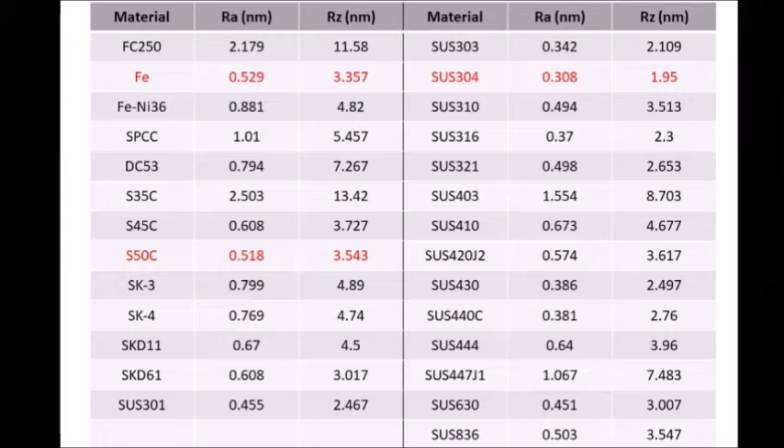The list on the right are stainless steel materials. We have polished 15 types of stainless steels. The best Ra is 0.3 nanometers, and Rz about 1.95 nanometers from the material stainless steel 304.

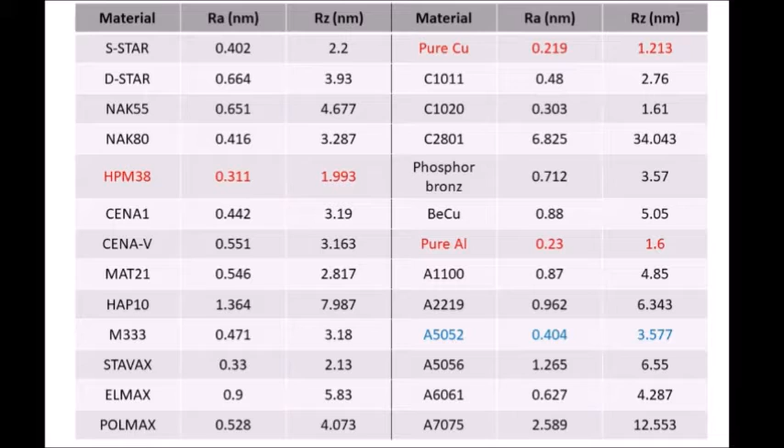The next section is aluminum. Pure aluminum also has the best roughness, and it is Ra 0.2 nanometers and Rz 1.6 nanometers. I have a sample of the item A5052. This surface is before lapping. It has lots of scratches. This surface is after lapping. Roughness is Ra 0.4 nanometers and Rz 3.5 nanometers. Isn't it shiny and beautiful?

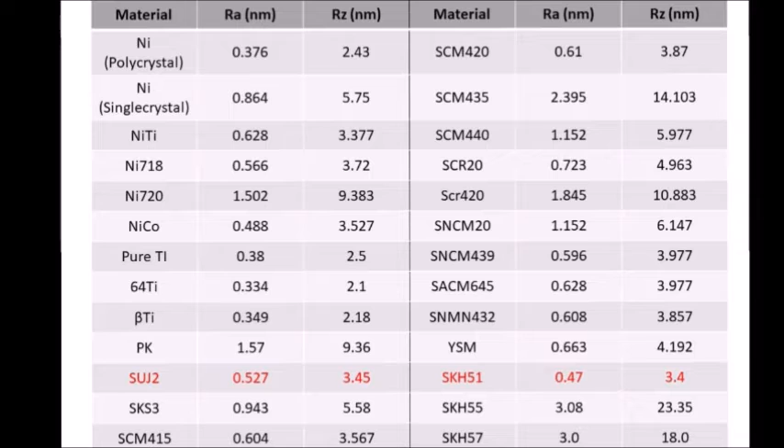Let's move on to the third page of metal. SUJ2 has the best roughness in this section. Ra is 0.5 nanometers and Rz 3.4 nanometers. Material SKH51 in the bottom has the roughness of Ra 0.4 nanometers and Rz 3.4 nanometers.

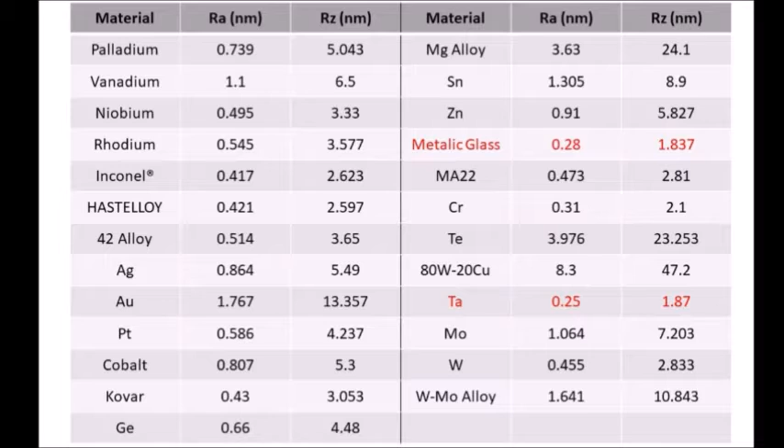Fifth page of metal. This is the last page from metal materials. The material spron, which is an alloy of cobalt and nickel, has a good roughness. Ra is 0.26 nanometers and Rz 1.1 nanometers.

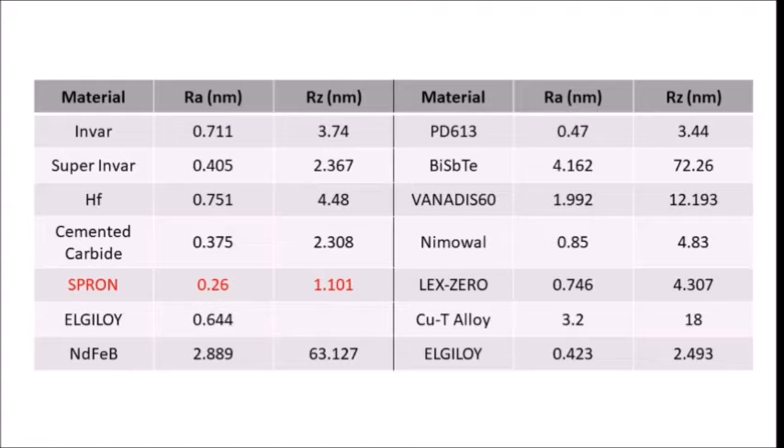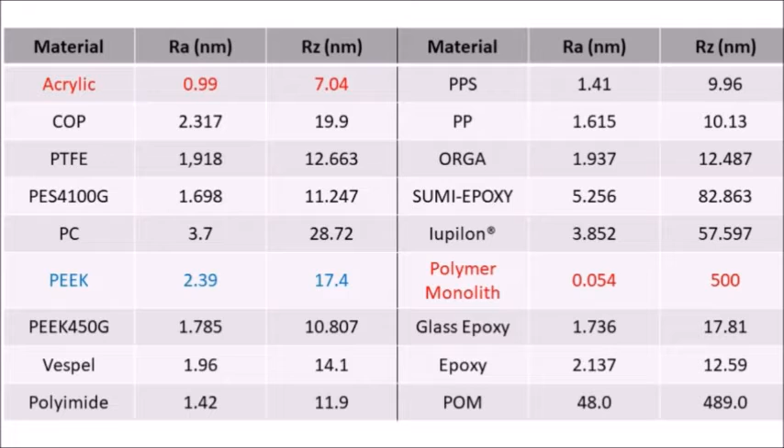The next material we will introduce is resin. The material acrylic has the best roughness. Ra 0.9 nanometers and Rz 7 nanometers. Also, a material called polymer monolith has a great roughness of Ra 0.05 nanometers. I have a sample of the material named PEEK. This surface is before lapping, and the back surface is polished down to Ra 2.39 nanometers, Rz 17.4 nanometers. You can see the difference quite clearly.

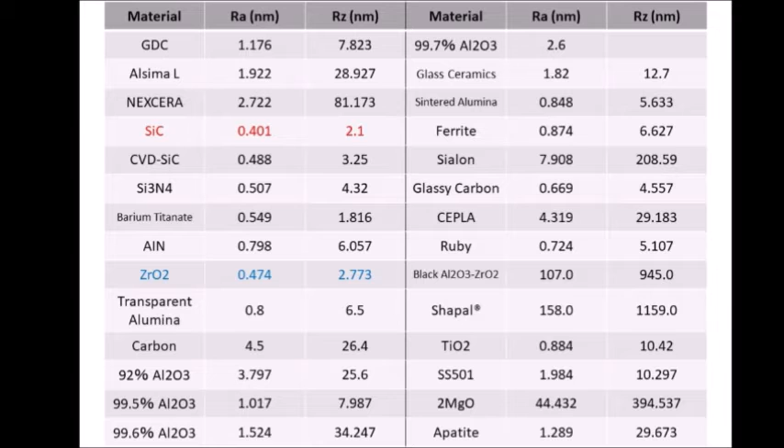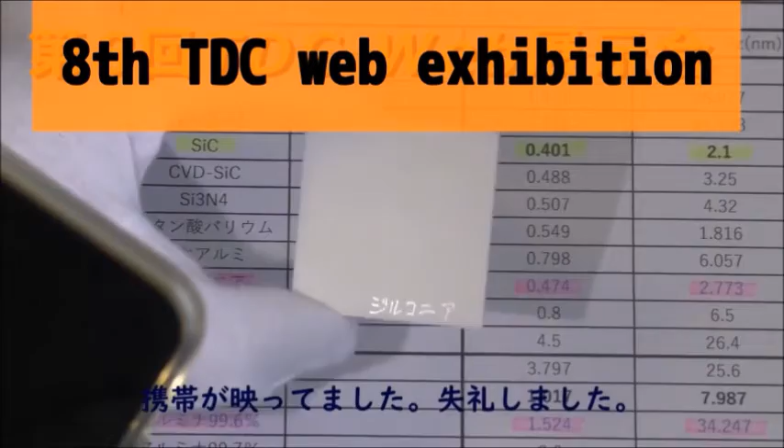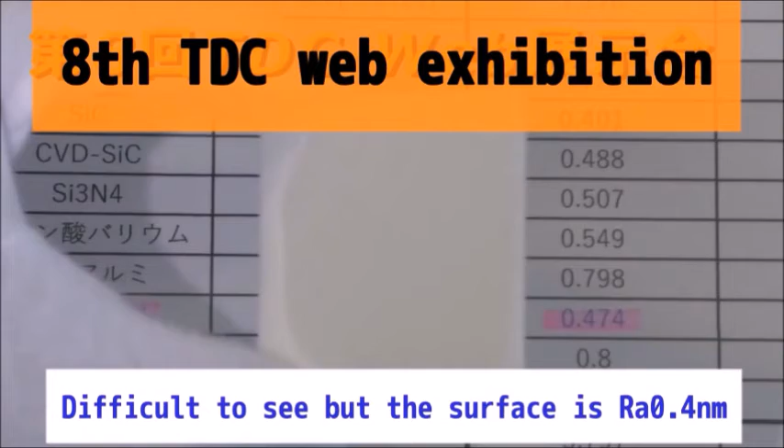I have a sample of zirconia, so let's take a look. Sorry for my cell phone in the way. This surface is before polishing, the surface that the material itself has. This surface is after polishing. It looks shinier than before. Roughness is Ra 0.4 nanometers and Rz 2 nanometers.

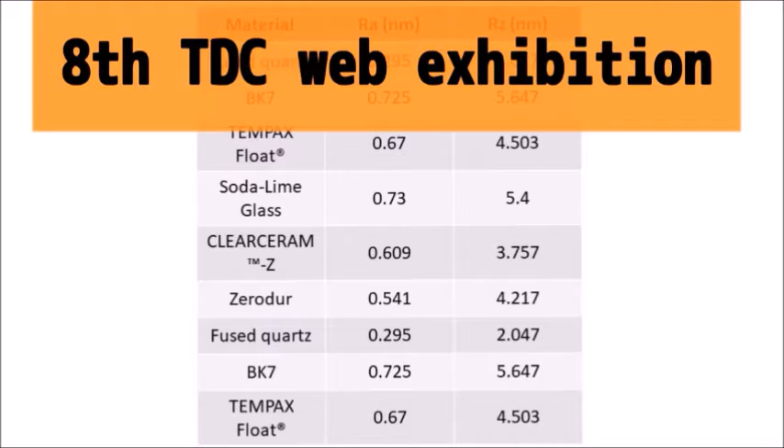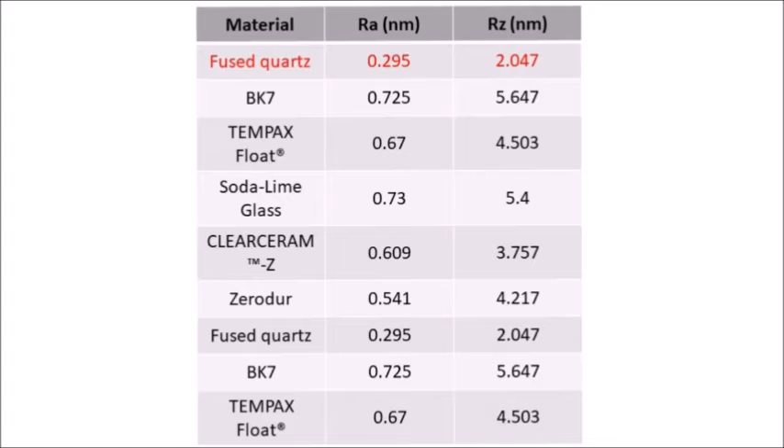Next material is glass. We have 6 types of glass polishing experience. The item with the best roughness is quartz glass. Roughness is about Ra 0.3 nanometers and Rz 2 nanometers.

This is the list of semiconductor items, and we have polished 19 materials. Single crystal SiC has the best roughness, which is Ra 0.07 nanometers. Also, silicon has a good roughness, Ra 0.16 nanometers and Rz 1.16 nanometers. We can achieve Ra 0.38 and Rz 2 nanometers with diamonds. This diamond was also single crystal.

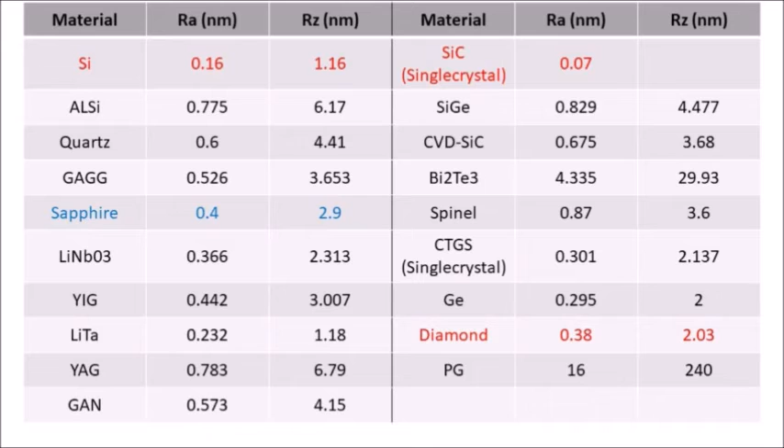Let's see a sample now. This is a sample of sapphire. It is not flat like the other samples. It has a convex shape like this. We have polished both surfaces, so we can see through it so clearly. Ra is 0.4 nanometers, Rz 2.9 nanometers.

The last list is plating items. We have 12 items on this list. Chrome plating item has the best roughness. Nickel and copper plating also have good roughness. And the roughness is about Ra 0.3 nanometers and Rz between 1.7 to 1.9 nanometers.

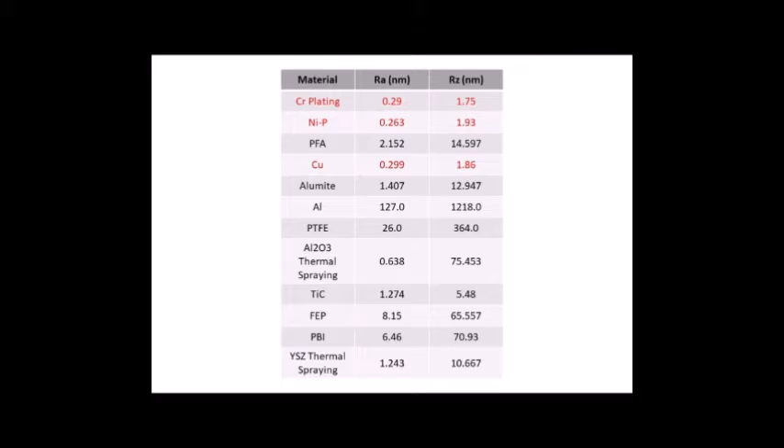We use our measurement tools in-house. All of the data I explained about today was measured by this non-contact optical 3D profiler, CCI Sunstar from Taylor Hobson. We also have NewView 9000 from Zygo, and sometimes we use this tool for measuring roughness. Also, there is an AFM from Bruker that can be used for checking roughnesses.